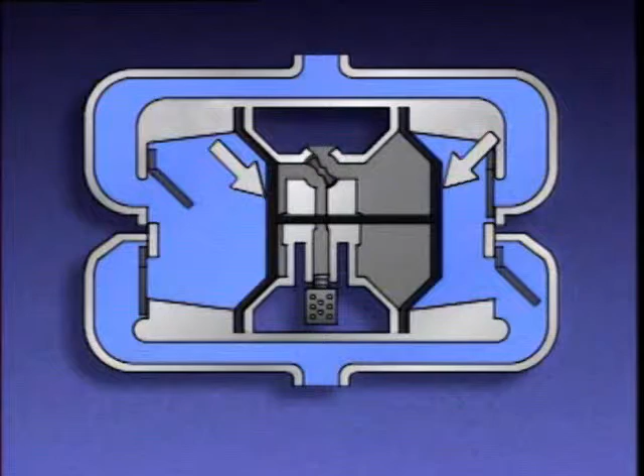The areas on these sides of the diaphragms are for the compressed air, and the areas on the other sides are for the process liquid. The air valve, located here, simultaneously directs compressed air to one diaphragm and exhausts air from the other. Here are the suction valves for the liquid, and here are the discharge valves.

During operation, the air valve admits compressed air to one of the diaphragms. When air enters this side of the pump, both diaphragms flex in this direction. This increases the pressure of the liquid on the left side of the pump, which closes the suction valve and opens the discharge valve.

On the right side of the pump, the pressure was reduced, closing the discharge valve and opening the suction valve. So on this stroke, liquid was forced out of the left side and drawn into the right side of the pump. Then the air valve operates to allow compressed air to enter the right side and vent the air applied to the left side of the pump.

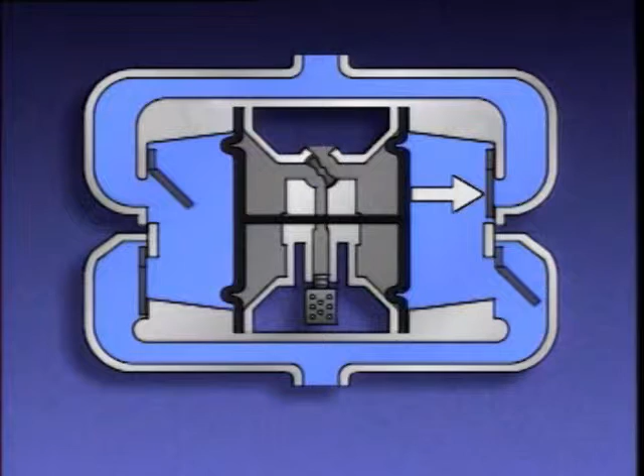When this happens, the diaphragms flex to the right. This reduces the pressure on the left side of the pump, causing the left discharge valve to shut and the left suction valve to open. At the same time, the pressure on the right side increases, causing the right suction valve to close and the right discharge valve to open.

So on this stroke, liquid was drawn into the left side of the pump and forced from the right side. The cycle continues as long as air is alternately supplied to and exhausted from both sides of the pump.

In this topic, we looked at two common types of diaphragm pumps: motor-driven pumps and air-operated pumps. We looked at the basic construction of these two pumps and saw how they operate. Now is a good time to try some practice questions about diaphragm pumps.

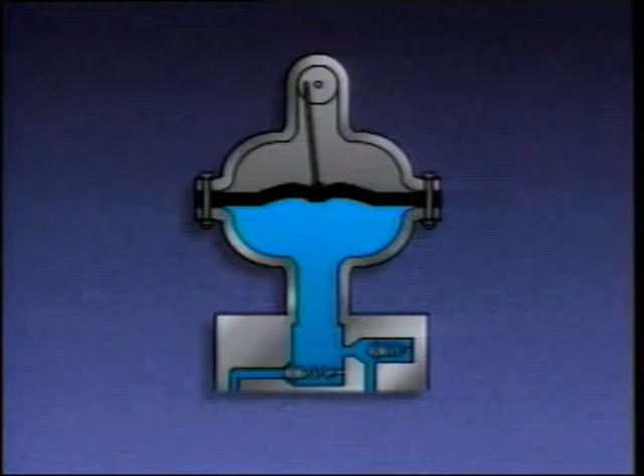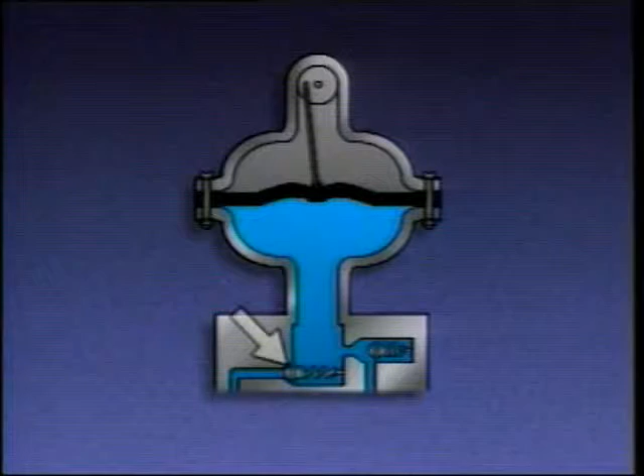The eccentric rotates and forces the diaphragm downward to start the discharge stroke. The downward motion of the diaphragm exerts a force on the liquid in the cavity, which increases the pressure. The increased pressure closed the suction valve, opened the discharge valve, and pushed the liquid out of the pump.

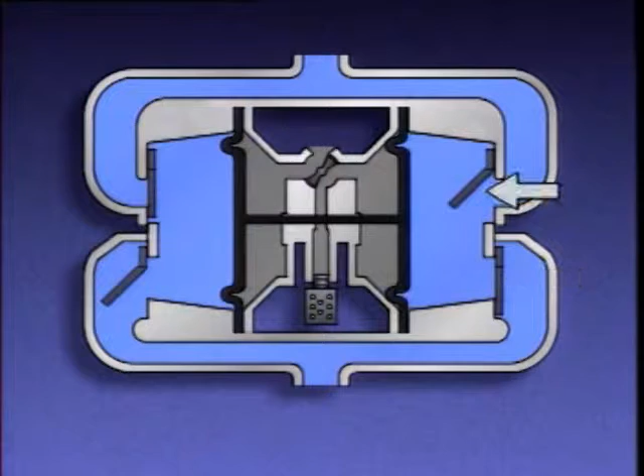When the diaphragms moved in this direction, the pressure of the liquid increased on the left side of the pump. This closed the suction valve and opened the discharge valve. On the right side of the pump, the pressure was reduced, which closed the discharge valve and opened the suction valve. So on this stroke, liquid was forced out of the left side and drawn into the right side of the pump.

Pump startups and shutdowns are an essential part of basic pump operation. The procedures we're about to see include some of the basic steps often followed during the startup and shutdown of one particular type of reciprocating pump. But keep in mind that startup and shutdown procedures can vary according to the process, the plant, and the pump involved, so you'll always need to follow the specific procedures used by your plant.

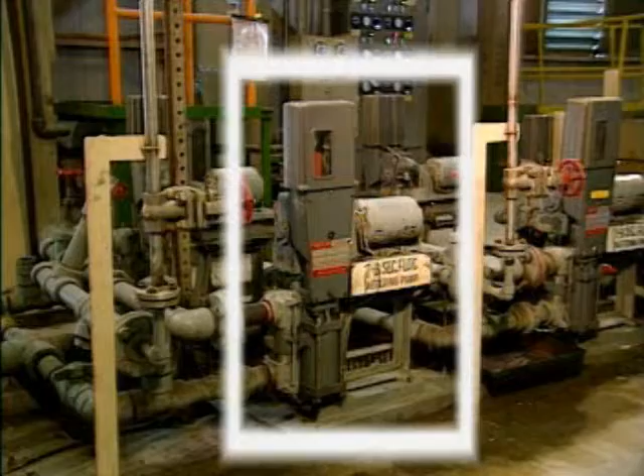This is the pump we'll use for our demonstration. It's an electric motor-driven diaphragm pump used to add chemicals to a wastewater treatment process.

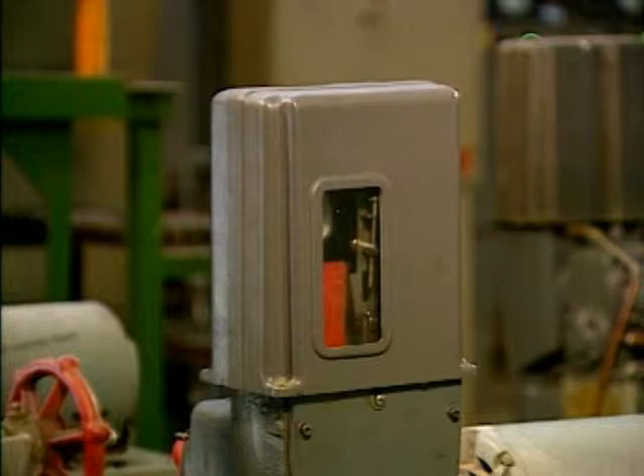The amount of liquid discharged from the pump can be adjusted by this positioner. The positioner controls the amount of liquid that is drawn into the pump on each stroke. It's adjusted to control the amount of chemicals that are added to the wastewater treatment process.

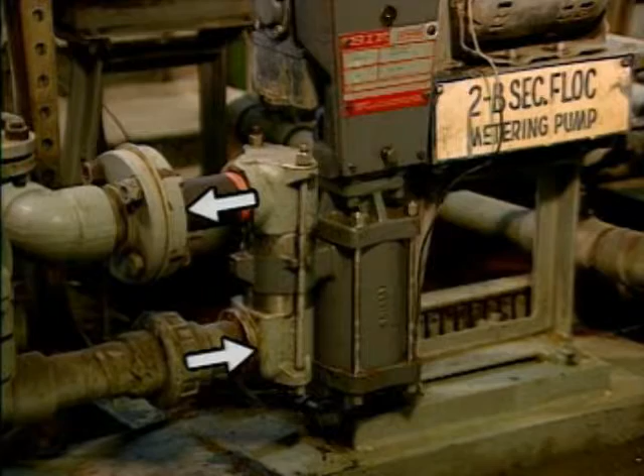The flow paths into and out of the pump are controlled by a series of isolation valves. For this pump, there's an isolation valve for the suction and an isolation valve for the discharge of the pump.

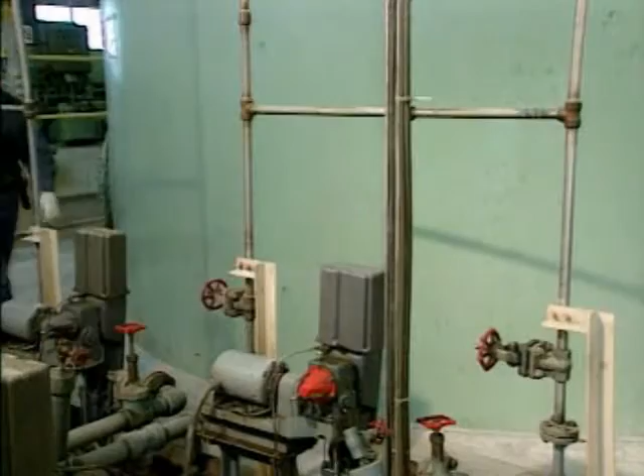The first step in the startup of the pump is to ensure that it's properly lubricated. This involves checking the oil level in the lubricator. Once that's done, the flow paths for the pump are lined up.

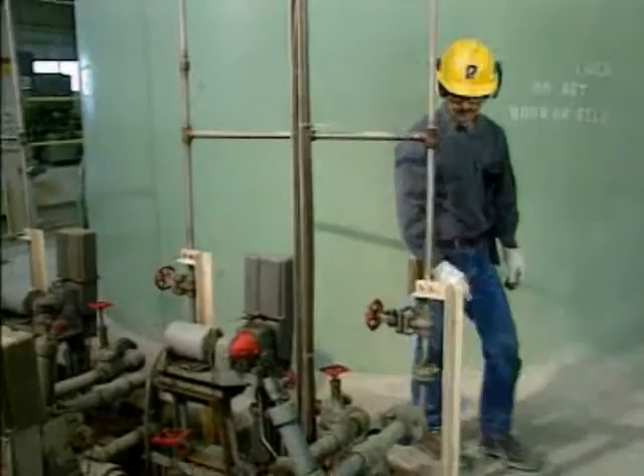The suction valve is opened first. This establishes a flow path to the suction of the pump and allows liquid from the chemical tank to fill the pump. Once the suction flow path is established, the discharge valve is opened. This establishes the flow path out of the pump.

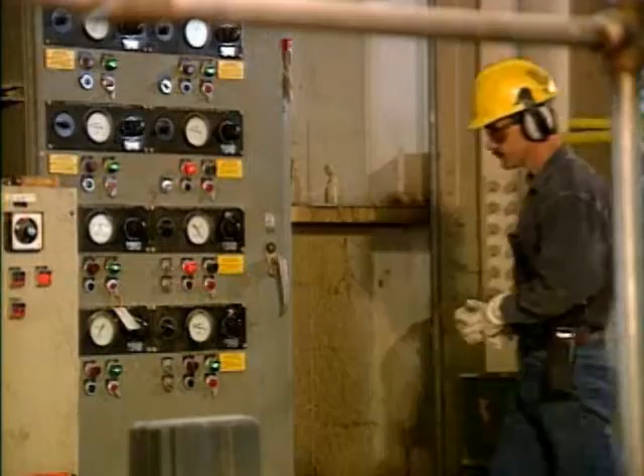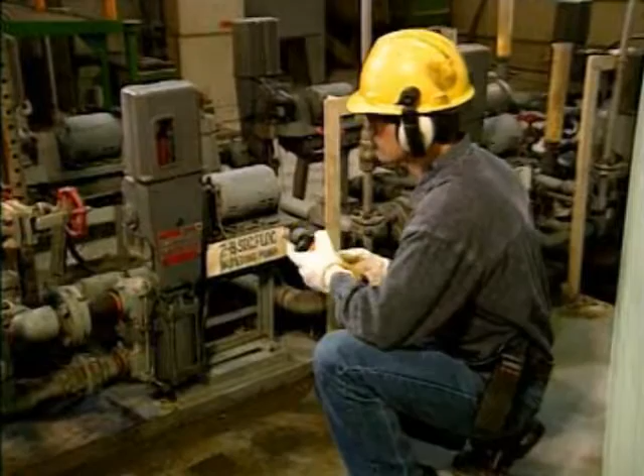With the flow path established into and out of the pump, the next step is to start the pump. Once the pump is started up, the operator checks the pump's performance. For example, the operator checks the operation of the positioner. Any problems with this component may require the pump to be shut down.

It's also a good idea to check for leakage, unusual gauge readings, unusual noises, and excessive vibration. These conditions can serve as warnings about potential trouble with the pump.

As with a startup, the procedures for shutting down a pump can depend on several factors, such as whether it's being shut down to a standby condition or for maintenance. Since shutdown procedures can vary, it's important to know why the pump is being taken out of service and to follow the appropriate shutdown procedures used by your company.

In this example, the operator receives word to shut down the pump. So he first stops the motor. This stops the movement of the diaphragm.

Then he goes to the isolation valves for the pump. There he isolates the liquid flow path into the pump by closing the suction line isolation valve. Then he isolates the liquid flow path out of the pump by closing the discharge line isolation valve. At this point, all the flow paths into and out of the pump are shut off, and the shutdown is complete.

Like all positive displacement pumps, reciprocating pumps try to deliver a controlled amount of liquid on each reciprocating movement. But if the discharge is blocked, the liquid won't have any place to go. If this occurs, pressure could build up and damage the driver, the pump, or associated equipment.

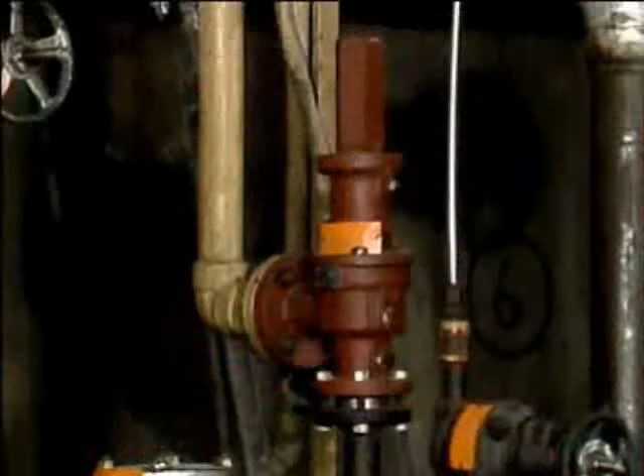A common type of protective device used to prevent excessive pressure is a relief valve. The relief valve is used to relieve discharge pressure that exceeds a predetermined value.

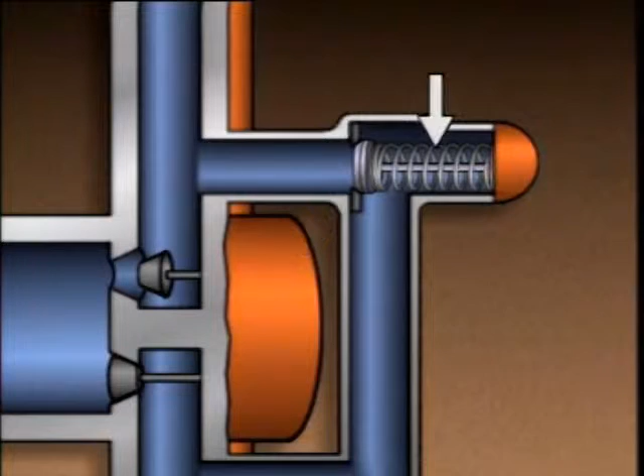The inlet of the relief valve is connected to the discharge of the pump, while the outlet of the valve is connected to the pump suction. When the pump is operating normally, the liquid from the discharge of the pump fills the chamber below the valve disc. Liquid from the suction of the pump fills the chamber above the valve disc.

During normal operation, the spring holds the disc closed on its seat. The discharge pressure of the pump applies force to the other side of the valve disc. If the discharge pressure becomes excessive, it overcomes the force of the spring. This will move the valve disc off of its seat and relieve the pressure from the discharge of the pump.

When this happens, the liquid flows back to the suction side of the pump and recirculates through the pump. As long as the discharge pressure of the pump is above the predetermined set point, the relief valve will remain open. But when the discharge pressure falls below the set point, the spring overcomes the pressure that's holding the valve disc off of the seat and reseats the valve.

In this topic, we looked at some basic procedures used to start up and shut down one type of reciprocating pump. We also saw how a relief valve works to protect a pump. Now let's try some practice questions.

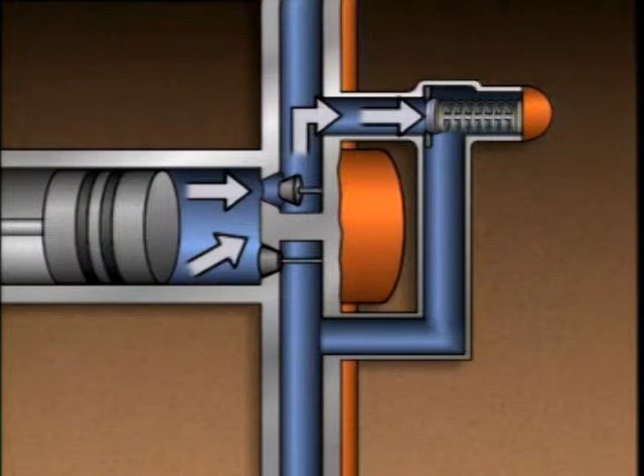During normal operation, the spring holds the disc closed on its seat. The discharge pressure of the pump applies force to the other side of the valve disc. If the discharge pressure becomes excessive, it overcomes the force of the spring. This will move the valve disc off of its seat and relieve the pressure from the discharge of the pump.